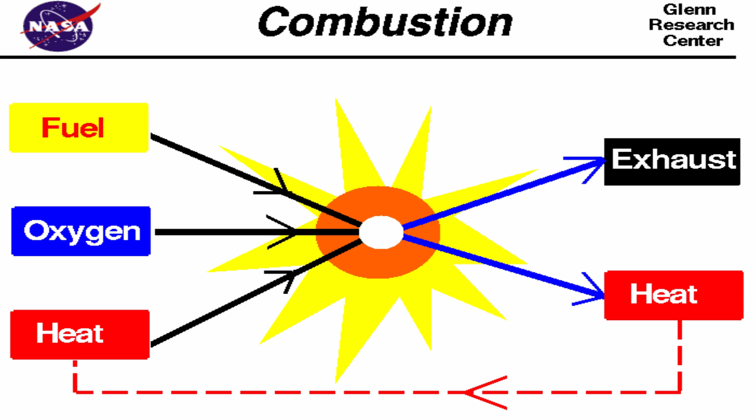In the physics session, I'll be discussing the physics behind the internal combustion engine. The vehicle uses an energy resource called fuel. Fuel stores potential energy, and to release it as an energy source, a combustion reaction needs to occur. A mixture of oxygen and fuel will cause this reaction, which releases heat energy.

In the process of internal combustion, the mixture of fuel and oxygen enters a cylinder, then the valve closes. The piston inside the cylinder pushes the mixture upward in the closed cylinder, causing pressure and increased heat. A spark inside the cylinder ignites the fuel and oxygen mixture, causing it to expand. The pressure of heated gases pushes the piston downward. The piston then pushes up again to push out the exhaust gas through another valve. The piston pushes downward, causing the whole process to happen again.

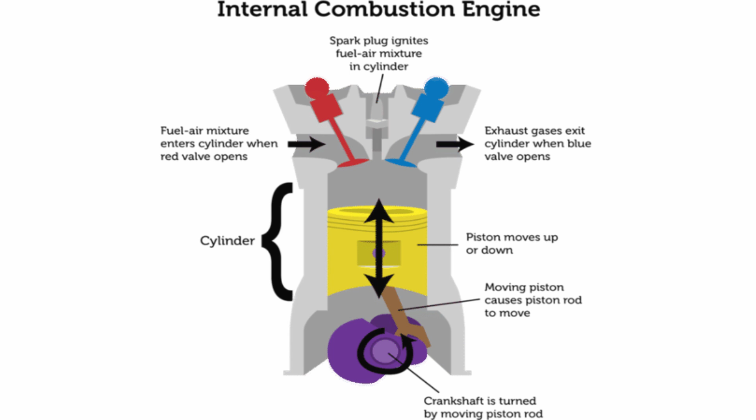The expanding combustion causes the piston to move up and down, meaning the crankshaft rotates, which is connected to the drive shaft. The drive shaft is responsible for turning the wheels, causing the car to move. There are two types of internal combustion engines in production: the spark ignition gasoline engine and the compression ignition diesel engine.

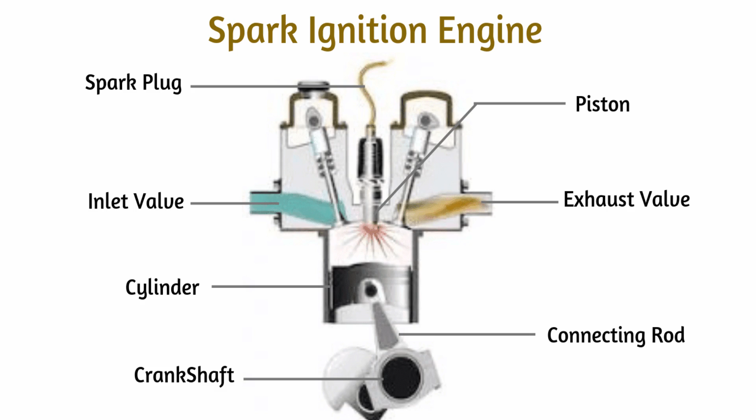In spark ignition, fuel is mixed with air, then inducted into the cylinder. The piston compresses the mix, and the spark ignites it, causing the combustion reaction. A compression ignition diesel engine uses only air inducted into the engine, then compressed. The diesel engine sprays fuel into the heated compressed air, causing it to ignite.

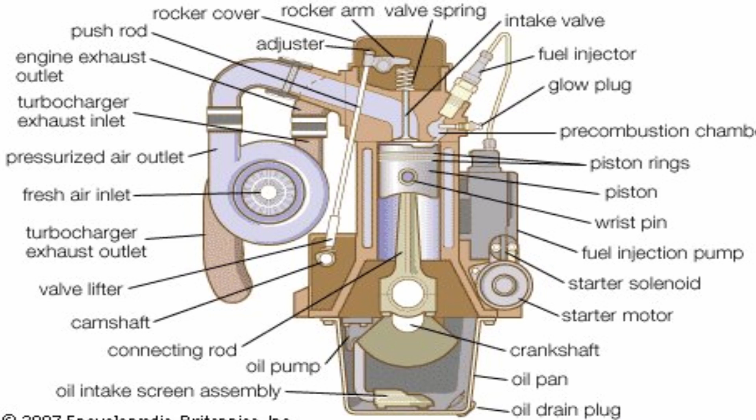There are multiple variant types of stroke engines, such as the commonly used two-stroke engine and the four-stroke engine, each with their advantages and disadvantages. The two-stroke engine uses two piston stroke movements to create energy. It takes one cycle for the two-stroke engine to create power because exhaust and intake of gas happen at the same time. The valve for the intake stroke opens and closes, caused by the changing of pressure. Here are some main steps that are part of the two-stroke engine process.

The first process is the compression stroke. This happens when the inlet port opens up. The air-fuel mixture enters the chamber, and the piston moves upward to compress the mixture. When the spark plug ignites the compressed fuel, the power stroke begins. That leads to the next process, the power stroke, where heated gas exerts high pressure on the piston, moving it downward. The waste gas is exhausted.

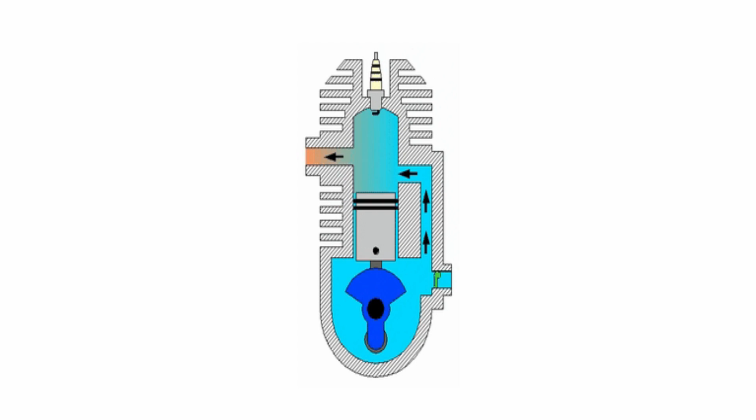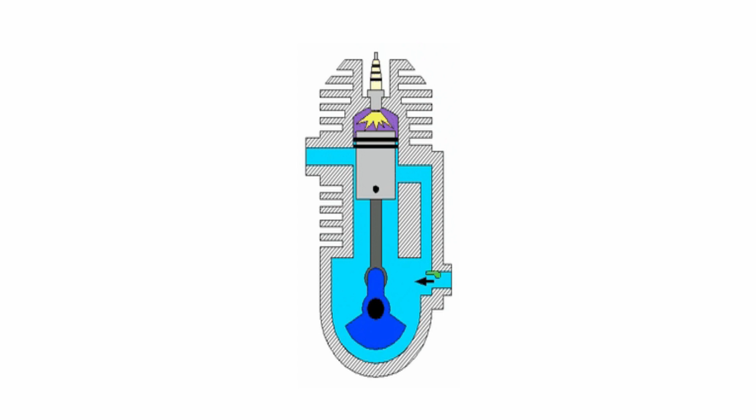Compared to the four-stroke engine, the two-stroke engine is lighter, more efficient, more cost-effective, and can use lower-grade fuel, but it lacks maneuverability and needs more lubrication.

In a four-stroke engine, one power stroke is two cycles of the piston. There are four processes in the four-stroke engine. The intake stroke makes the piston move downward, increasing the volume of fuel-air mixture into the chamber. The compression stroke is when the intake valve is closed and the piston moves up the chamber to the top, compressing the fuel-air mixture.

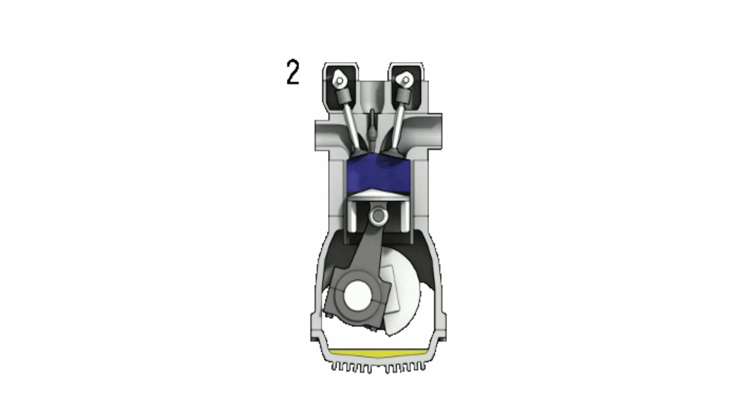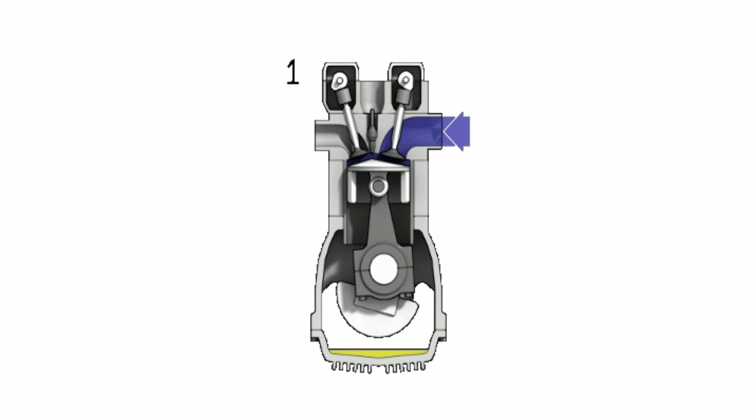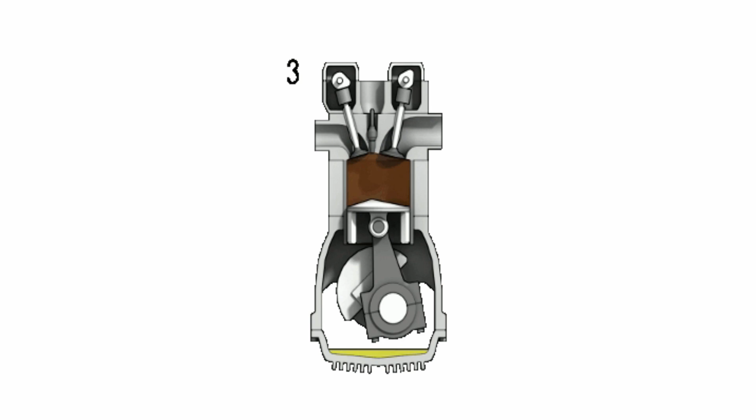At the last moment of the process, a spark plug provides the compressed fuel with the activation energy required to make combustion occur. The power stroke is when the fuel reaches the end of its combustion. The heat released from combusting hydrocarbon increases pressure, causing the gas to push down on the piston and create power output. The exhaust stroke is when the piston reaches the bottom. The exhaust valve opens, meaning the remaining exhaust gas is pushed out by the piston as it moves back upwards.

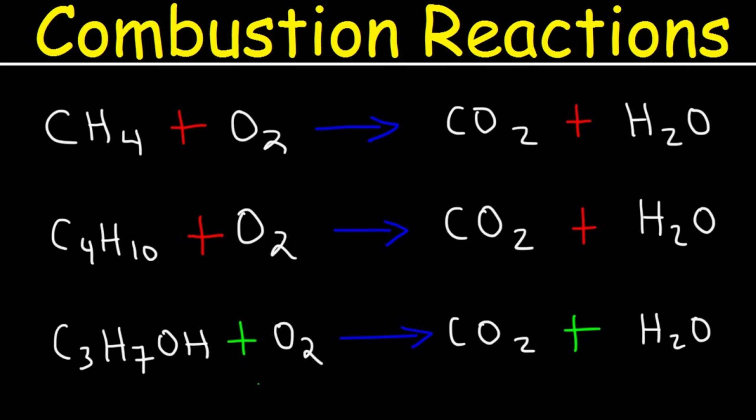Now let's take a look at the environmental aspects of combustion reactions. Let's start with the impacts. Unfortunately, combustion reactions are a major cause of global warming. Collectively, cars and trucks account for nearly one-fifth of all U.S. emissions, emitting around 24 pounds of carbon dioxide and other global warming gases for every gallon of gas.

About 5 pounds comes from the extraction, production, and delivery of the fuel, while the great bulk of the heat-trapping emissions, more than 19 pounds per gallon, comes right out of the car's tailpipe. In total, the U.S. transportation sector, which includes cars, trucks, planes, trains, ships, and freight, produces nearly 30% of all U.S. global warming emissions, more than any other sector.

Burning fossil fuels like gasoline and diesel releases carbon dioxide, a greenhouse gas, into the atmosphere. The buildup of carbon dioxide and other greenhouse gases like methane, nitrous oxide, and hydrofluorocarbons is causing the Earth's atmosphere to warm, resulting in changes to the climate we are already starting to see today.

But not only do cars commit combustion reactions, cooking, cleaning, creating electricity, and many other things require combustion as well. These things are not much better than powering internal combustion cars. The effects can go from forest fires to boiling water. Either way, they would still release carbon dioxide, methane, and other greenhouse gases into the atmosphere.

You may be thinking, how does cooking affect the environment? Let me tell you. Think of how we cook. We cook in the oven, we cook on the stove, and even in microwaves. Each one of these can be tied to combustion, whether it be physically lighting a wood-burning stove or oven and cooking the food, or using an electric oven, stove, or microwave.

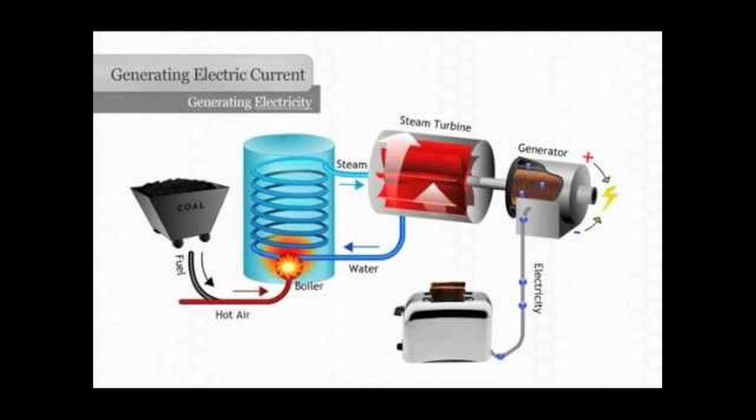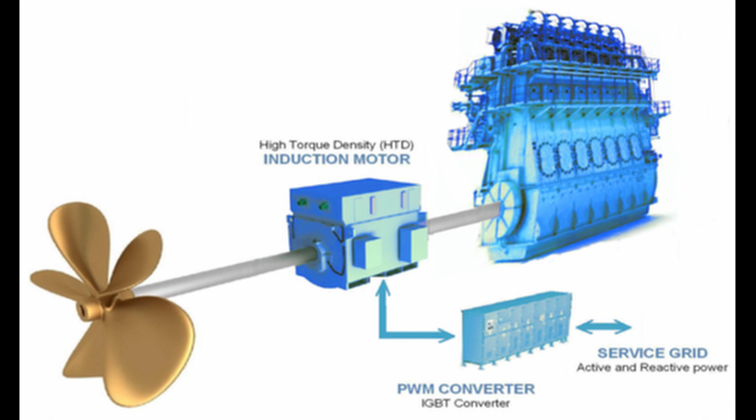Going into depth of how electricity is made using combustion would take hours, so here's a quick summary. Natural gases are burned in things called combustion turbines, where the gas expands through, becomes pressurized, and then spun around to produce mechanical power. This mechanical power is then converted into electric power through more generators found in combustion turbines.

With this explanation, we can easily conclude that creating electricity does exhaust an equivalent amount of combustion and maybe more into the atmosphere. Although it may seem safer while you are using an electric stove or oven, it is just a chain of reactions that makes it appear safer to the environment than it actually is.

Now, let's take a look at the benefits. Although it would be nice for combustion reactions to have multiple positive effects on the environment, most combustion reactions will only help the social and economic aspects while bringing down the environment.

They might not be beneficial to the environment, combustion reactions, but there is an alternative that we can use so we can minimize the amount of combustion required. This would be to use battery-operated machines instead of combustion ones. Although they are not as efficient, they can lower the number of combustion reactions affecting the environment substantially.

But with all good things, there's always a string attached: battery disposal. As batteries corrode, the chemicals soak into the soil and contaminate ground and surface water. This could lead to aquatic animals being severely injured or our tap water being contaminated by dangerous materials.

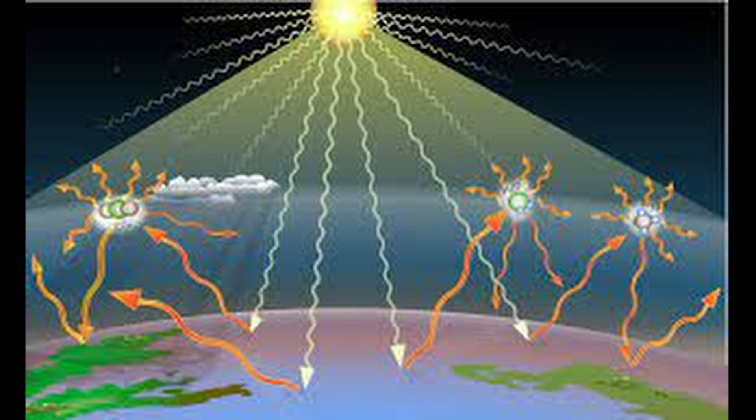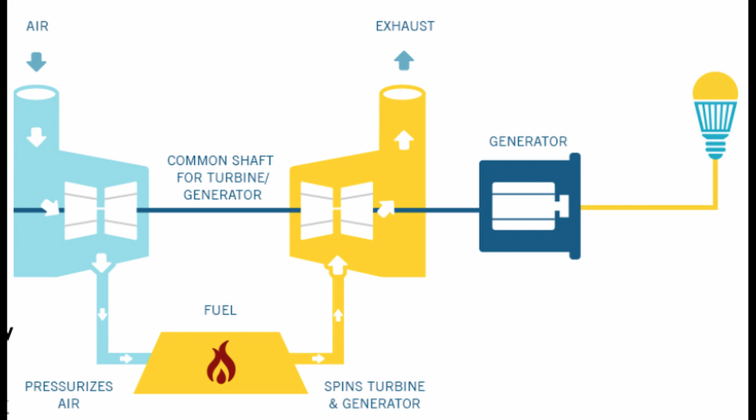The vaporized form of improperly disposed batteries also gets trapped in the atmosphere and pollutes lakes and streams in the form of rain. All in all, combustion can make us warm food, moving vehicles, electricity, and other beneficial things, but it will have a hard time benefiting the environment as much as it benefits us.

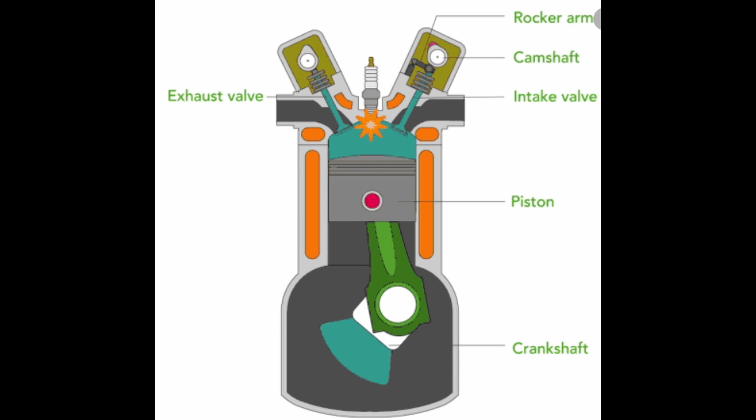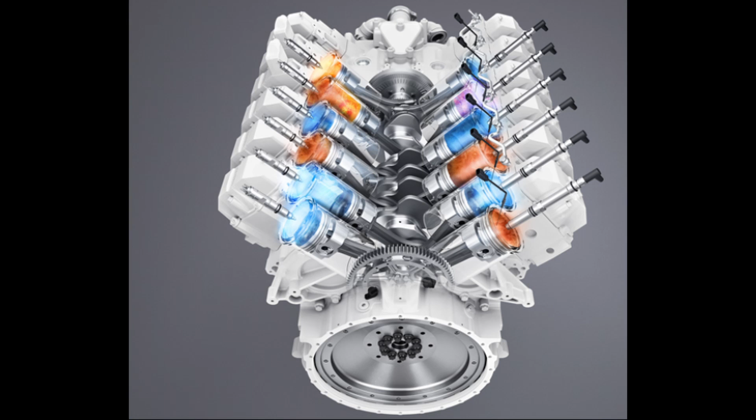Combustion energy, along with the combustion engines that utilize it, have helped shape and progress human society to what it is today. Many of the mechanisms and machines we use today are all thanks to the creation of internal combustion engines, also known as ICE. Things such as airplanes, cars, and tractors all use internal combustion engines.

One of the biggest impacts to society internal combustion engines have is the creation of ICE cars. The creation of cars has provided humans with many different benefits. Allowing for easier access to transportation for all kinds of distances affects both human life and how cities and society is structured.

Being able to travel farther more reliably with cars can help people get certain resources easier. They can either travel to a store to buy their essential goods or order them and have someone deliver them to them. This makes it much easier for humans to survive no matter where they are living.

The creation of cars also affects how cities and towns are planned and built. Instead of stores, restaurants, and shops being built in close proximity of the housing area of the community, they can instead be built farther away, since the average human could easily travel farther out with their car. This also makes it much easier for people to get jobs, since long-distance jobs are much more feasible to do, since you can just travel the long distance in a car.

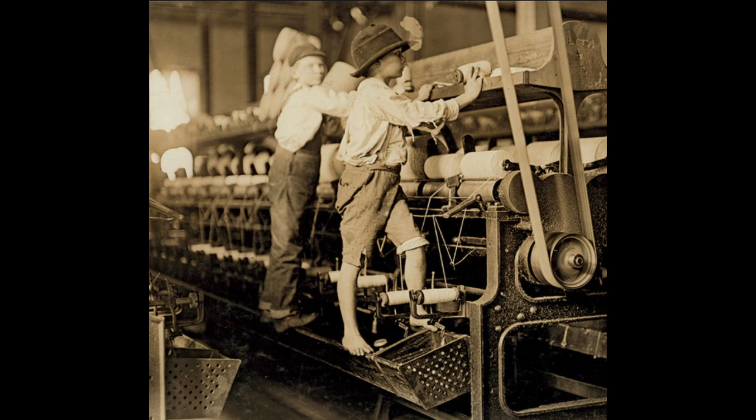The creation of combustion engines was also one of the catalysts for the Industrial Revolution, which caused a widespread automation of everything. This era in history included many great advancements and inventions which helped develop human society forward.

Combustion engines have also helped with the interconnectivity and relationships between families and relatives. Before, it used to be very hard for people to be close with their families and relatives because they either lived in other towns, countries, or even continents. However, it is much easier today to visit and connect with them with the use of airplanes and cars. This also makes it much easier for families and relatives to move to different countries and cities, allowing people to live in close proximity with their friends and family, making a tighter bond and connection with them.

Food and cooking greatly benefited from the introduction of combustion energy and engines. The majority of cooking and food utilizes heat and the burning of materials in order to create a tasty meal. Many kitchen appliances, such as ovens, use combustion energy in order to cook meals. This gives us humans the reliability to always be able to cook food as long as we have electrical energy to power our houses. Combustion energy is also used in many electric heaters for people's homes, providing heat and warmth during times when it's cold, such as winter.

Altogether, combustion energy and combustion engines help develop society forward and improve human life with greater transportation, cooking, heat, relationships, and automation.

Since the invention of the internal combustion engine, it has had a growing impact on the world's economy, from the manufacturing of vehicles to the mechanic repairing the engine, and even the farmer growing crops to make biodiesel fuel.

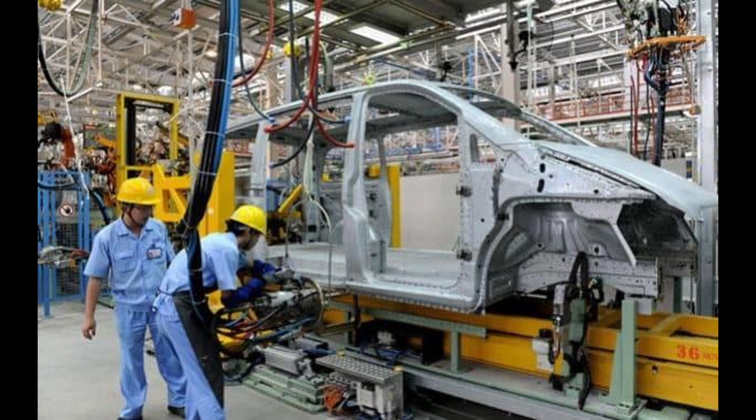One of the major economic impacts, possibly even the largest, is the manufacturing of cars. An internal combustion engine vehicle has 1,400 parts in its engine and transmission components, whereas its electric battery counterpart has only 200 components in its drivetrain system. This means it takes more time, work, and interaction with other industries to create an internal combustion engine vehicle, providing more work for employees and more business for other companies.

If the automotive industry shifts away from internal combustion engines and more towards other designs, it would take 30% fewer hours and 50% less floor space to manufacture.

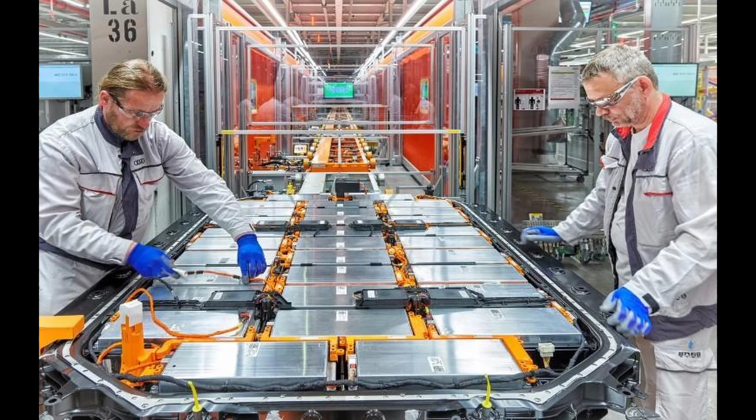Leading off of the last point, the internal combustion engine provides lots of employment across the globe. According to the European Commission, the automotive industry directly and indirectly employs about 13.8 million people across Europe. This represents 6.1% of European Union employment and 8.5% of the European Union's manufacturing employment.

The VDA, a German association of the automotive industry, conducted a study that proposed a ban on internal combustion engine vehicle production and estimated that at least 620,000 jobs would be affected by the ban, more than 10% of German manufacturing employment.

Even after all this other information, the most important part is still how this affects the average consumer. A compact internal combustion engine vehicle costs 44% less than its lithium-ion battery competitor, and a mid-size internal combustion engine vehicle costs 60% less than its lithium-ion battery competitor.

The cost to purchase and drive an internal combustion engine vehicle is also predicted to decrease over the next 10 years. Now that the car has been purchased, the economic impacts are still not finished.

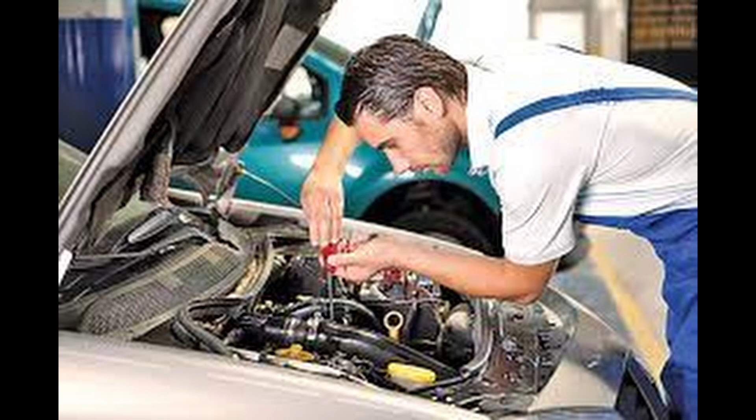Internal combustion engine vehicles might require more maintenance than an electric battery vehicle, but this is not just a drawback. It provides more work for repairmen and helps to employ lots of more skilled workers due to the significant increase in the number of parts needed for the engine.

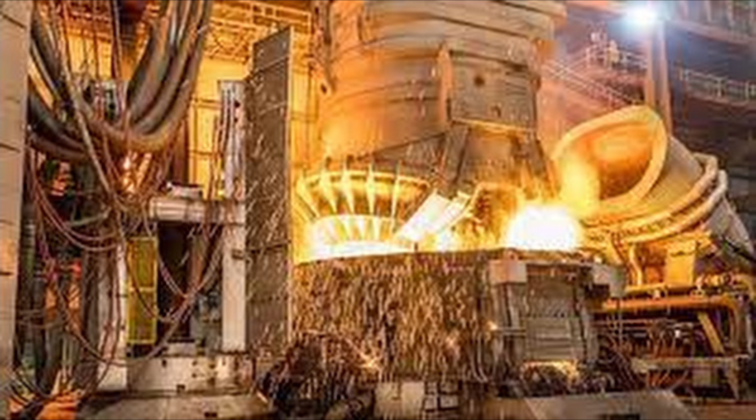Next, let's talk about the effects it has on other industries. The many parts required to manufacture an internal combustion engine means that it has a large effect on other manufacturing industries, such as steel, textiles, and chemicals, as well as some other small industries such as repair, mobility services, and machine tools industry. The internal combustion engine is a major part in keeping the fuel economy going.

In the US, the federal government gives subsidies to ethanol and biodiesel production. In 2005, they were giving 20 cents per energy equivalent liter of ethanol and 29 cents per energy equivalent liter of biodiesel.

Even the farming industry is affected by the internal combustion engine. Many internal combustion engines are fueled by biofuels made from corn and soybean. As of 2005, the United States were using 14.3% of their corn harvest and 1.5% of their soybean harvest to make biofuels. If internal combustion engines were removed, the net farm income would decrease by approximately $27 billion.

In conclusion, the internal combustion engine is something that has a very large impact on the economy and cannot be removed easily without causing major decreases in revenue and employment.

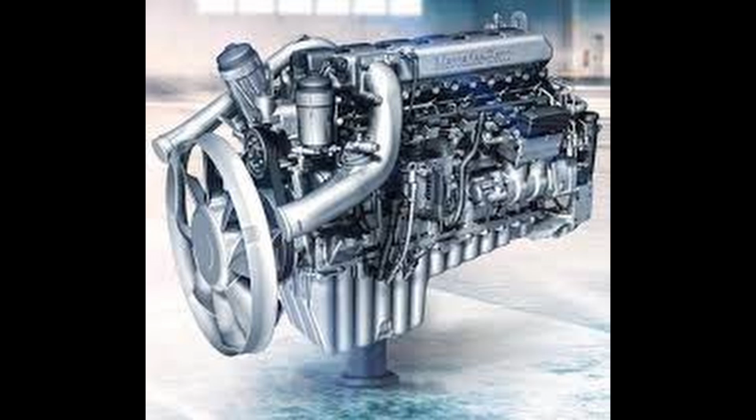From what we have discussed today, we can see that combustion has had many different impacts and benefits on the environment, social world, and economic state of our world today. Combustion can be used in ways to create different types of engines that we can use to make the wheels rotate to make our car move forward.

Let's also reflect on the environmental aspects of combustion reactions. There are many different impacts on the environment, barely any benefits, but there are alternatives. Every combustion reaction affects the environment in one way or another.

Altogether, combustion energy and combustion engines help develop society forward and improve human life with greater transportation, cooking, heat, relationships, and automation. The economic impact of the internal combustion engine is very large and provides lots of jobs and revenue to many industries across the world.